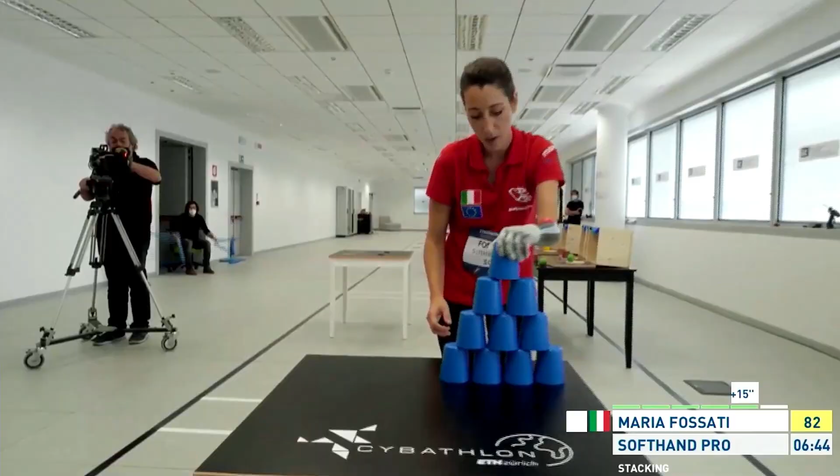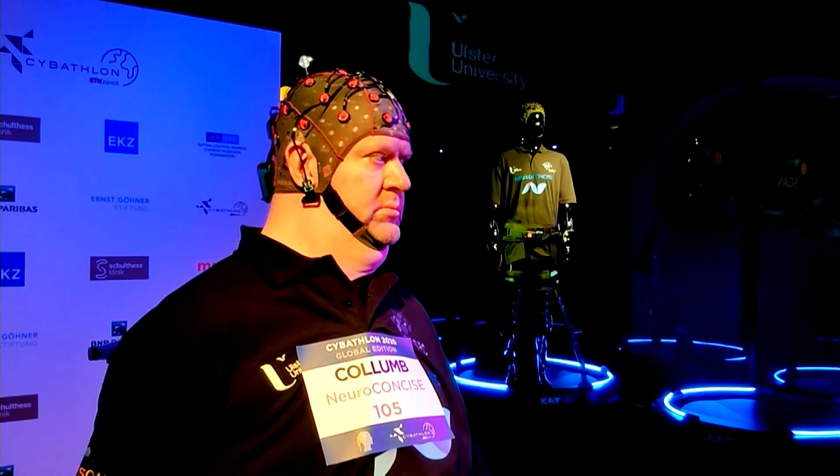What Cybathlon demonstrates is there are no boundaries. When you watch this event, you start to believe that is possible.

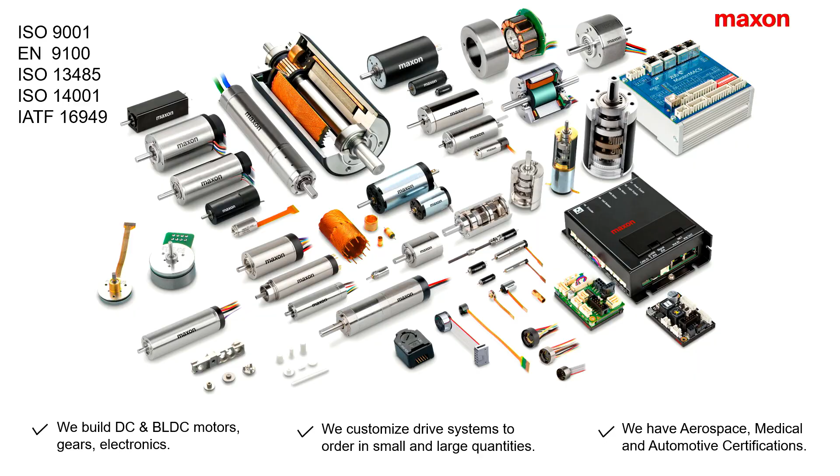We're already introduced. I just like to add, we're always very happy to discuss new, interesting, exciting technology opportunities.

One thing that is sometimes a bit overlooked: Max-Erik is not just a scientist and an engineer, but he can also support you in how you bring your idea to business success. So we also try to help you there.

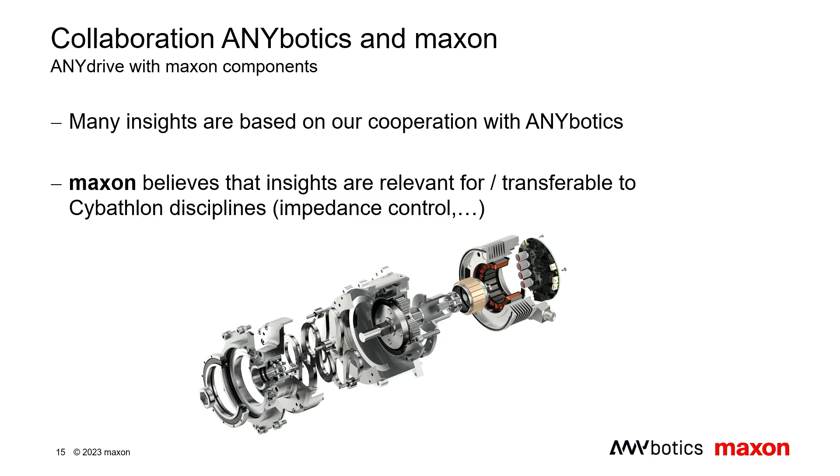Now, outside-in versus inside-out technology development. Before I go into the topic, a short disclaimer: a lot of the topics we discuss today, a lot of the lessons we learned in the past, originate from our collaboration with ANYbotics, so shout out to them. They're a fantastic company, we really enjoy working with them. We believe a lot of the lessons we learned are transferable to Cybathlon, that's why we're here today. But if you don't think so, in the Q&A please challenge our assumptions. If you don't know them, check them out, they have amazing videos and a very cool product.

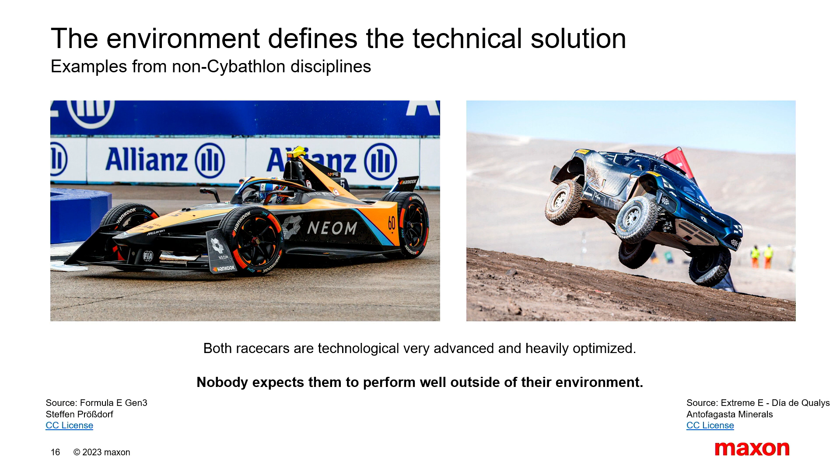Now, outside-in versus inside-out technology. It's all about the race, right? So this is maybe not the race you're in, but both of those systems are designed to finish a race as quickly as possible, to win, like Cybathlon. So the overall objective is the same, but they are very different. Why are they different? Because they operate in very different environments, right? And no one would come to the idea to take a Formula E car and apply it to a rallycross stage. It's not going to work, even though both are amazing technologies.

So why are we showing this? One, because I like cars, I spent some time in the automotive industry. Two, it's very clear no one would expect them to perform well in the other environment.

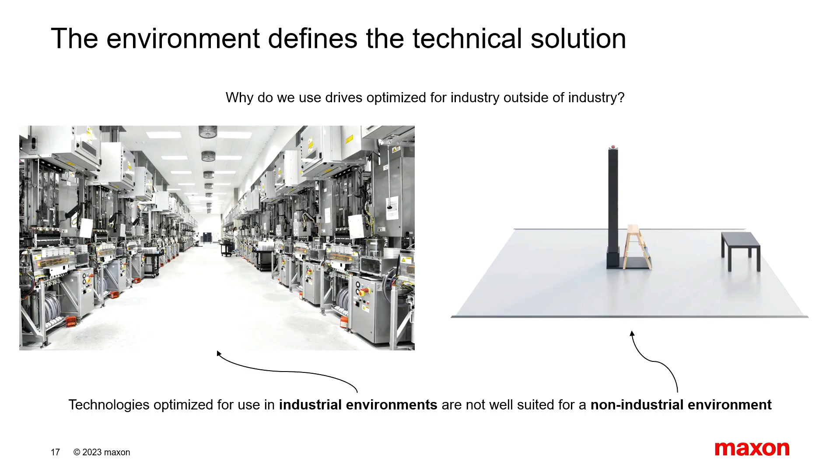So the question that we have is, why do we do this? Why do we use technologies that were developed in an industry environment and are optimized for an industry environment, and apply them to Cybathlon? Or if you think where your technologies will go in the future, outside, right? Your pilots at some point should leave the Cybathlon challenge. You would like to have people walk around here on stage or in the environment, a very unstructured environment. So we believe solutions that work well on the left are not necessarily working well on the right. And this is what we mean when we say the environment defines the technology.

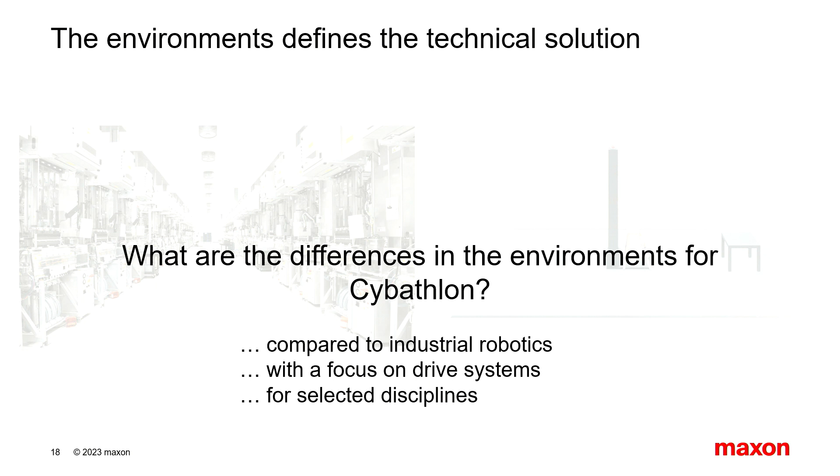So if you start to think about the solutions that work for Cybathlon, you should look at the environment you're operating in the long term. And you should compare it to the status quo, because a lot of people, when they talk about robotics, think about industry robotics, maybe even without knowing them. They're biased to that, to what they know. Now, we're not saying that robots in an industrial environment are boring or not challenging. There are some amazing technological challenges, and Maxon is also active there. We're just saying they're very different to what you need.

So robots in industrial settings work in a safe environment. What we mean by that is you cannot just walk into an automotive production facility where half-built cars are moved around by big heavy robots. It's protected, there are emergency shutoffs, the system will shut off if a human enters. This is different to Cybathlon or to any robot going outside of the protected environment.

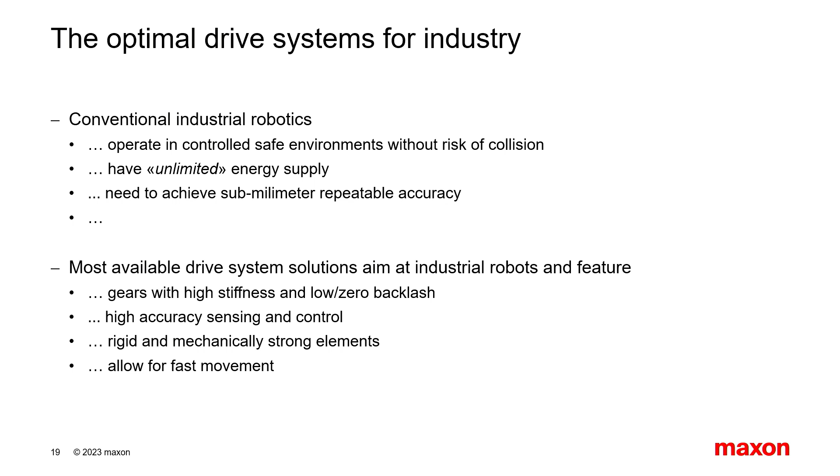They need to be super precise, right? If you have a robot that assembles a printed circuit board, you need sub-millimeter repeatable accuracy. If you walk with an exoskeleton outside, not necessarily. So the drive systems that were developed for these applications meet those challenges using specific technologies, and those are not necessarily the technologies that you need.

So, applying this to Cybathlon, starting with the Cybathlon disciplines, we looked at all 8 of them, and to be honest, there are 3 of them where we, as Maxon, cannot really help you. We still like to discuss brain-computer interfaces, no questions, but motors will not solve these challenges. The other 5, we might have something in our portfolio that can help.

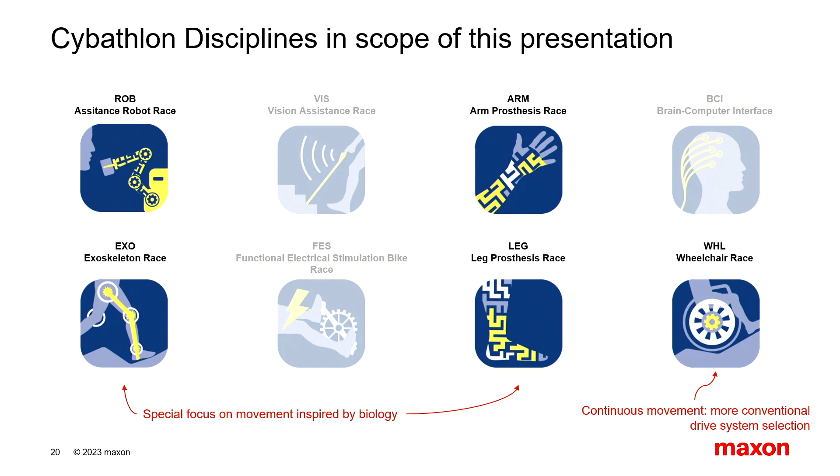And we would like to split those into 2 groups, right? There is continuous movement, driving around. That's a bit different to the other 4 disciplines, which are, I would call them, movements inspired by biology. So we will focus on the 4 on the left, and then I have a slide giving a bit of a line on how you can apply this also to the wheelchair race. Now, to make things a little easier, we just focus on the exoskeleton in the first step. So what's special about an exoskeleton and about the environment an exoskeleton operates in, right?

In the end, what we want to do, maybe not next year in Cybathlon but in the long run, is have someone with an exoskeleton be able to walk like a person without one, or maybe at some point do more. Why can't someone in an exoskeleton run faster than an athlete without one? What do we need to do to get to this point?

We believe to answer this, there are some characteristics to keep in mind. Exoskeletons are battery powered, they need to carry their own energy supply, unlike an industrial robot. Drives in an exoskeleton are part of the problem, but also part of the solution. You have to carry the weight of your own drives, so if you have light and efficient drives, your job gets easier.

A lot of movement is net-zero work. That is shared by some industrial robots too. I'll explain in a minute what we mean by this.

Collisions cannot be avoided. Every one of us who has the fortune of being able to walk without assistive technologies, without an exoskeleton, we stumble all the time. We run into furniture. Collisions happen. How do we build exoskeletons that can deal with that fact?

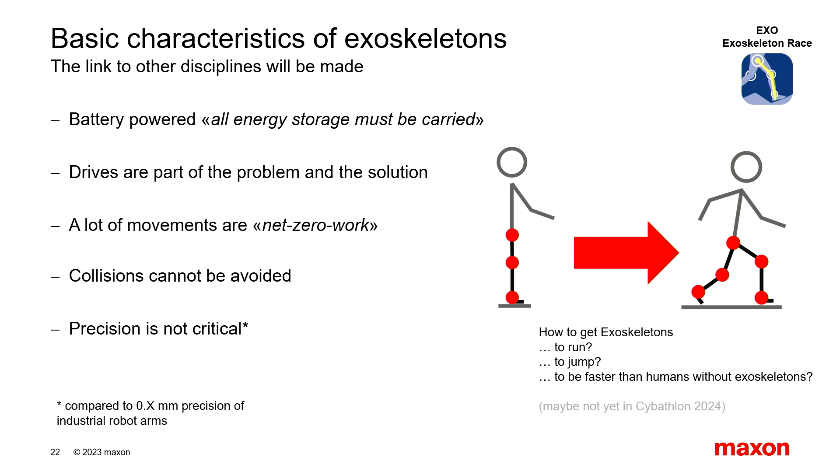And precision is not critical. It doesn't matter if I stand here or 0.1 millimeters to the right, you're not going to notice. So you don't need the same precision as in an industrial drive.

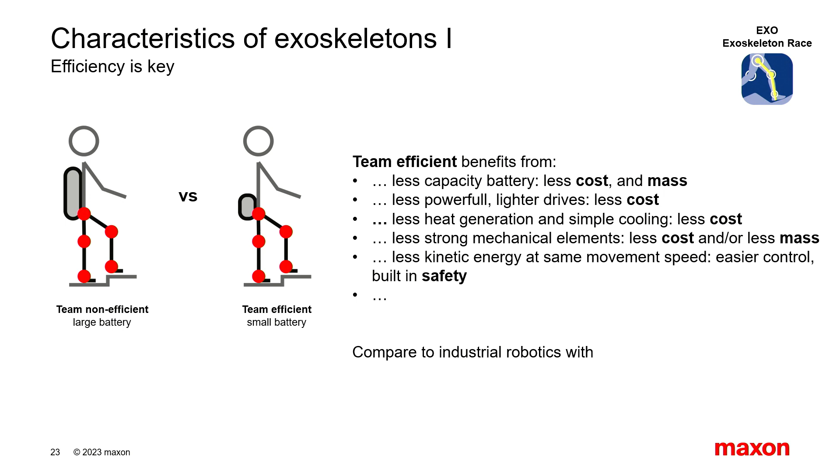The team on the right has somehow found solutions to be more efficient, so the job gets easier and easier. There are feedback loops that make it even easier: less cost, less mass, easier control, less impact energy, and so on. So try to be efficient. It's not as important when you're an industrial robot designer.

Second one, zero work. If you look at your Cybathlon disciplines, you start somewhere with speed zero, do some task, and end somewhere with speed zero. So the energy state at the beginning and at the end is the same. Everything you expend in work, you can get back. If you climb up a flight of stairs, you will also climb down.

So think about drive systems that are good at recuperating energy, because then you can make your battery even smaller. If you look at conventional data sheets, including ours, for motor drive systems in robotics, you only get one quadrant, the motor quadrant. But you also care about generator operation. So challenge this assumption that you're only looking at one part of the problem.

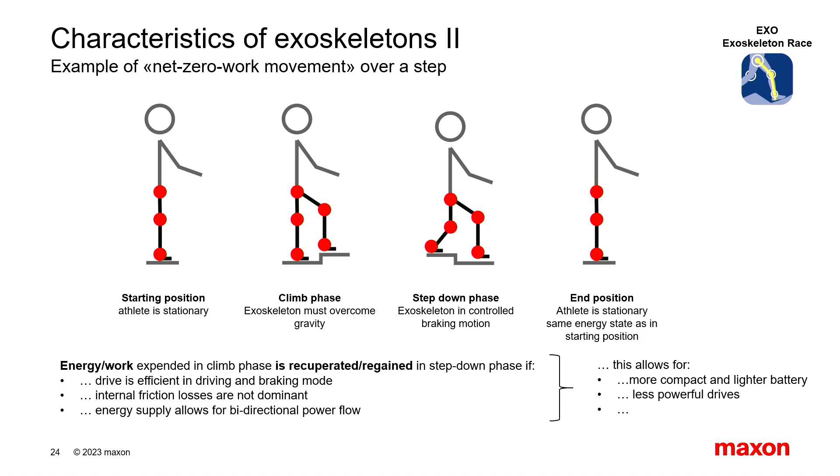And this is actually my favorite part, the collision part. As I mentioned, we run into stuff. In Cybathlon, you have a semi-controlled environment, you can design it so you don't hit obstacles. But if you think about where your technology will end up, hopefully in the future, the people that use it will have this problem. So what can you do?

So think about this, and think about whether those super precise and heavy industrial robot drive systems are really the light solution that you need.

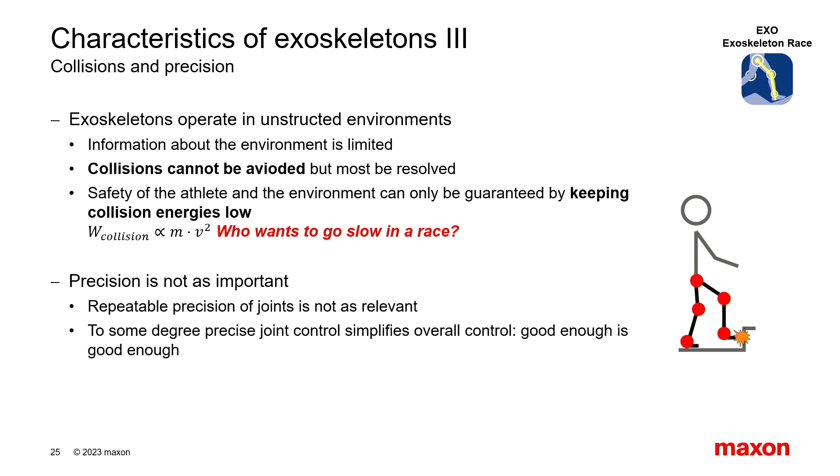Now the last point, precision is not important, I think I touched on this. Looking at the other applications, I'm not necessarily saying what we write here is completely correct. Depending on what you do in the assistive robot race, maybe you need a lot of precision, depending on your architecture and the solution you go for. But ask yourselves the question, and as a good starting point, focus on the difference to conventional robotics. Then think: which technologies can I change, which can I keep, how do I approach this?

The wheelchair race is a little bit different. You can still crash with a wheelchair, but usually the force and torque doesn't directly act on your driving system, so driving is a bit different from walking. But again, challenge all these assumptions.

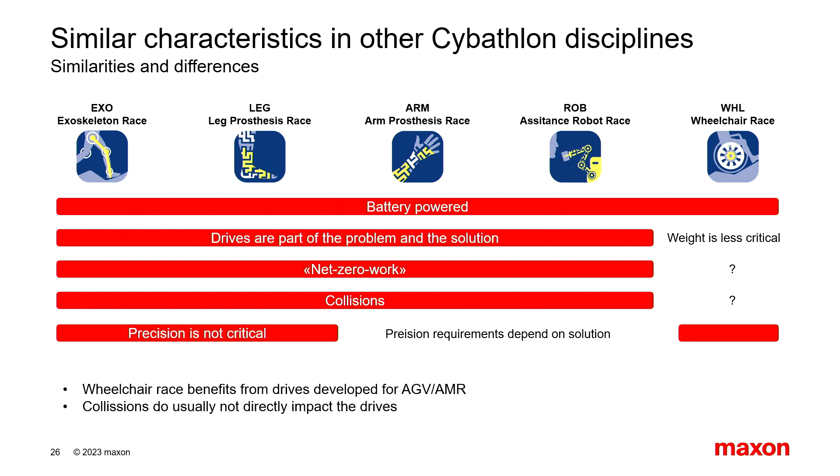Recapping this section: the environments are very different between conventional robotics and anything you use for Cybathlon. The question is, how do we select the right drive systems? And for that deep dive into uncontrolled environments, I hand over to Max-Erik.

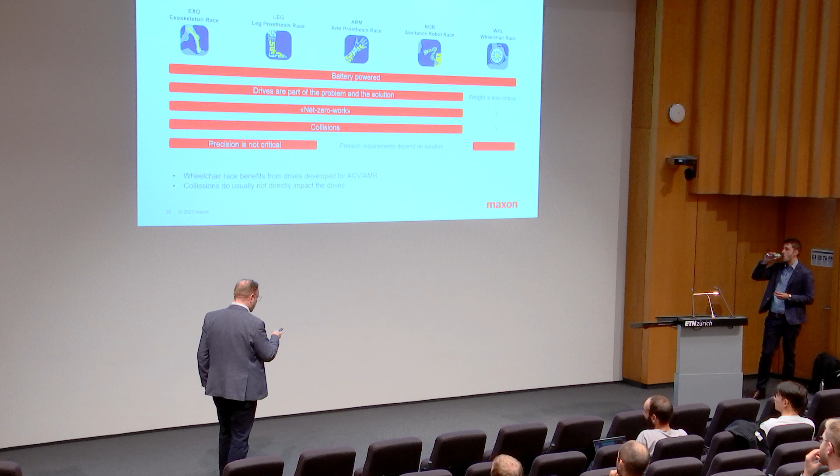And why can humans do that? First of all, we have our sensors on the outside, and we have the muscles on the inside, and there is a distance from the sensor to the bone. This distance is covered with an elastic element. So what happens is if our sensors are triggered, which is happening in this crash, then everything in the body will go down in energy, so it will do everything to get rid of the kinetic energy, if you want.

So in principle, you can say outdoor robotics is nothing else but management of collision energies. If you have a series elastic actuator of a robot with very high inertia, you will need a very thick spring. If a human being is very slow, he needs to have a very big body mass to actually absorb the collision energy.

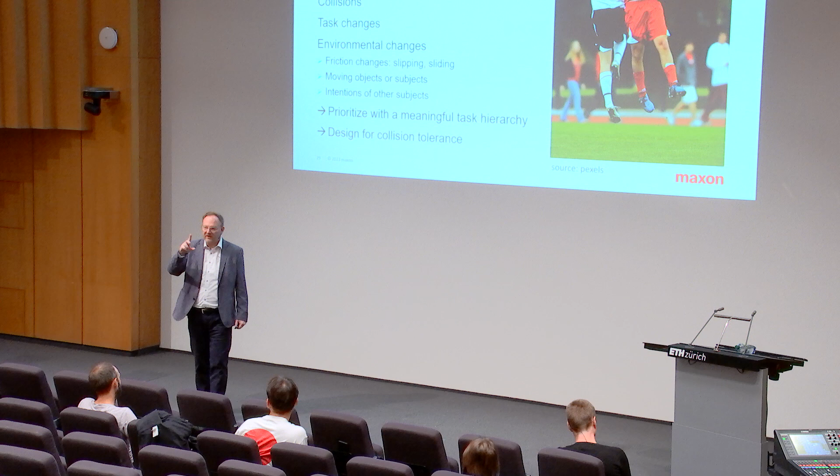Then the other thing in outdoor robotics is that motors are part of the problem and part of the solution, because the local derivative, the partial derivative, may be positive, but the total derivative may be negative. Adding torque to your system is not necessarily a good strategy. Let's put it like this: a cat can jump up trees, an elephant can't. They're both built with the same technology. So sometimes you may want to investigate if lowering the weight of an actuator actually helps.

And then the other thing to look at is, you don't have a measure of your environment. You're not in an industrial environment where you know everything, but you know nothing in principle. The only things you have are your eyes, your ground reaction force sensors at your feet, and the touch sensors at your skin. Everything has some kind of delay, and so you need very benevolent ballistic behavior if you want.

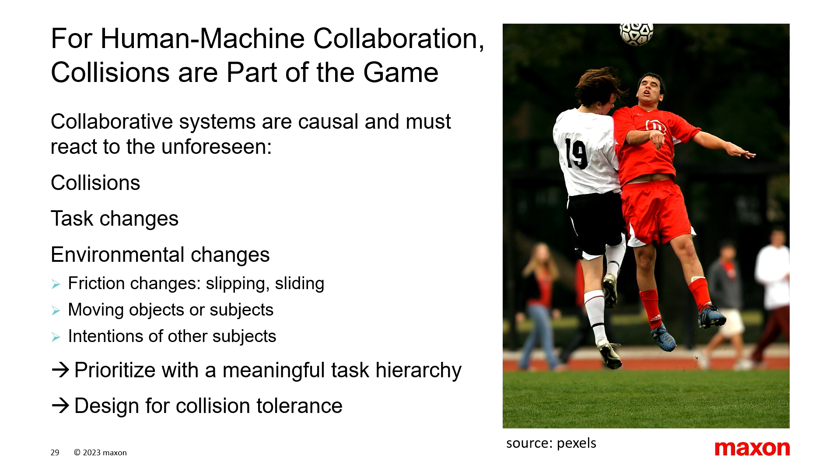It's clear, but that's your thing to solve, that you have to have a good task hierarchy and that you have to design for collision tolerance. So let's say we have two paradigms. One paradigm is the industrial robots, which are precise and where the motion pattern is in principle limited by technology, so you want to be as fast as possible.

In outdoor robots, actually, you don't know what's happening, and so you don't want to be as fast as possible. You don't just run around here in the ETH if there are other people, because you would crash into them. So the kinetic energy is not limited by technology, but it's limited by the collision scenario which would be probable. And the other thing is you don't need the precision.

For that reason, even if you want to be precise in a way, the question is, do you want total precision or do you just want local differentiability? Do you just want your Jacobian and your robot to exist? Oftentimes, if you have gravity assisting you, all gears, even if they have play, are in principle in a pre-constrained state, and so you have local differentiability without actually needing a very precise and very inefficient gear, which would probably be a strain wave gear, optimized exactly for the industrial environments which we don't want to talk about.

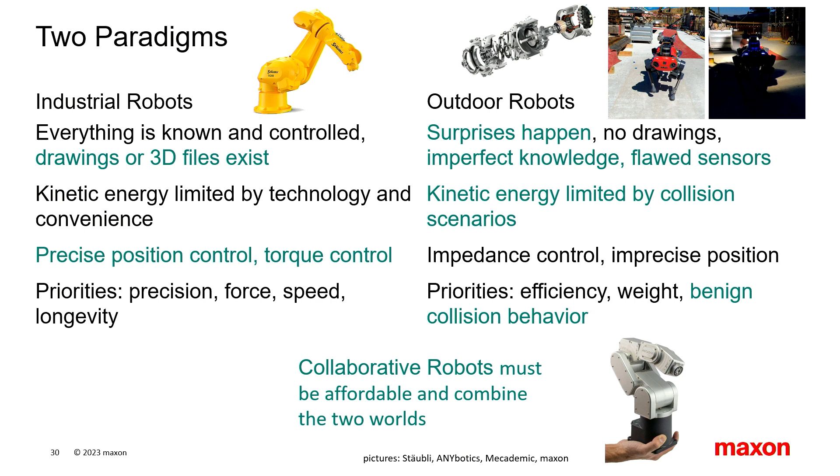So you see those two paradigms, and that means that you want to have impedance control, not necessarily position control, and you want to have some elastic elements, not necessarily something which is super stiff and super precise.

Now, the question is, if we say we have to limit impact energy, how do we want to do that? First thing is get slower. We have said already that is not really the strategy that you want to follow.

The other thing is you want to look for motors with a low mechanical time constant. What the heck is this? The easiest way to explain a mechanical time constant is that it links the motor constant, which relates the force of the motor to its inertia. If you have a certain relationship between torque and inertia, normally inertia is proportional to the square of the torque, and that's more or less a technology parameter.

So if you want to go down with this, you go for motors with a low mechanical time constant, not for motors with the highest torque density, for example, which is often a design error committed for outdoor robotics and which leads to very bad results.

Then the rest, I think you know: friction clutches are always good, or something which self-destroys at a given point and where you can reassemble, so magnetic couplings or whatever you want to have there. Lightweight design is a no-brainer. Use of tendons is something which humans have at perfection, and we'll go to that later. Putting the inertia where it doesn't hurt is a very good strategy for all kinds of robots. And then SEAs, that's clear, a no-brainer for the audience, I think, and even elastic padding.

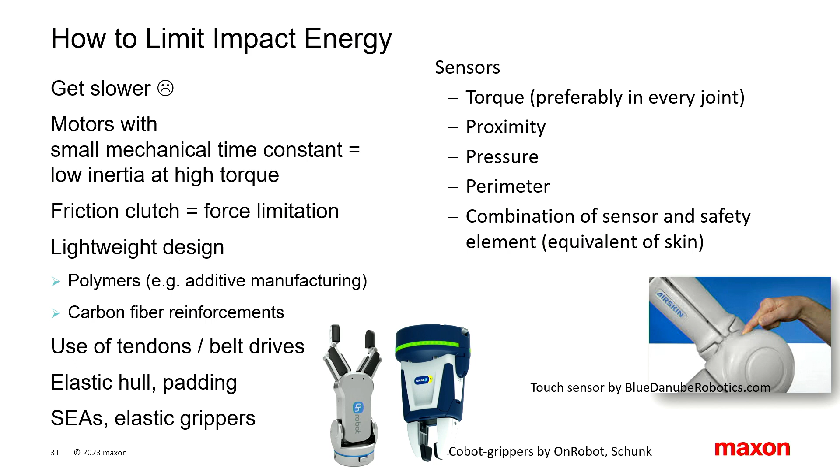One strategy which is often used, but not so much seen in Cybathlon I think, is that you say my elastic hull is also a sensor. So if you have an elastic hull with a pressure sensor or a microphone, it can function like a piece of skin where you really can make collision damage mitigation in time before something happens.

So what do contemporary robots require? There is always the engineer, the economist, and on the other hand the real requirements. Most of the time, I think people want to spend as little as possible on sensors, which I think also, if you look at what has happened in exoskeletons 10 to 20 years ago versus today, decent exoskeletons will use ground reaction force sensors because it's nearly impossible to derive your state without a GRF, for example.

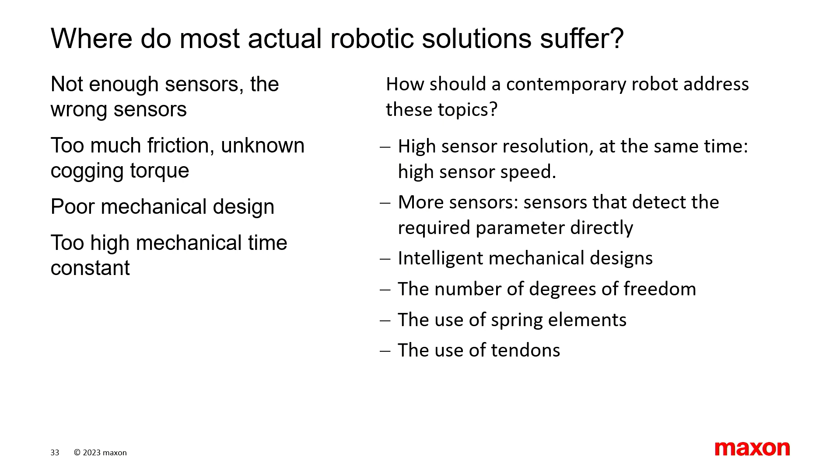So get more sensors, get meaningful sensors, and please sense what you want to measure, and perhaps spend more on sensors - they are not so expensive today anymore. That means, for example, having an IMU is much better than watching the motor current, which I would say is a poor strategy. It's always helpful, but try to also measure accelerations if you're interested in accelerations, or if you want to measure the body state, have good encoders, decent encoders.

It's clear that for robots, drive selection is not completely trivial. That's the reason why we have more than one motor. If there was the best motor, we would have a catalog with one motor. Life would be easy and really terrific for us, but alas, it's a little bit more.

So you see the selection criteria. I don't need to read them aloud to you, but it would be something where you really want to balance out all the things. Normally, for a Cybathlon environment, you would like to go for motors with low mechanical time constant. The other thing you want to look at is the losses at higher speeds. The third thing you want to look at is gears with very high efficiency, and I will come to that later.

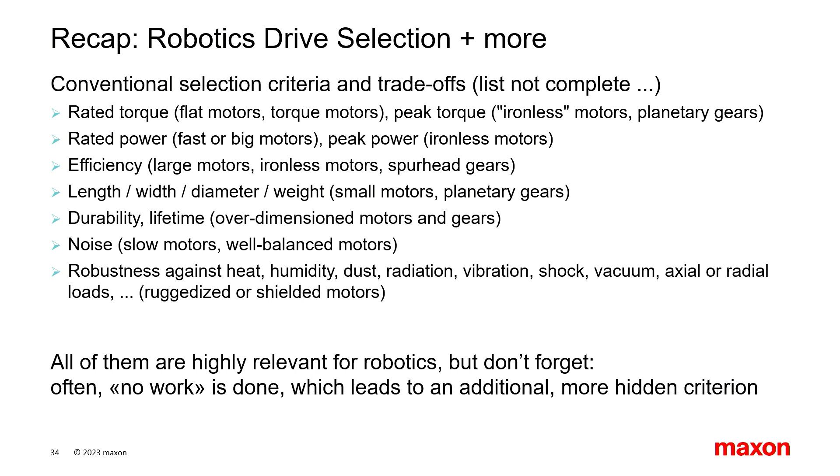Now we can make a deep dive and say, okay, what's happening if we want to go for movements with zero work? With movements with zero work, as mentioned before, efficiency is not exactly the criterion you want to look at, because efficiency is by definition zero. You have done something, you have done nothing, but you have spent something on it. So you go to an Olympic discipline, the 100-meter race, and the people are quite exhausted afterward, but you can tell them with a good conscience that they have committed zero work - so actually you've got a gold medal for doing nothing.

So, okay, what is here the figure of merit? The figure of merit must be something like the energy spent for a given task. And the given task could be something like moving a mass by a certain amount of meters in a certain time. So a mass, a distance, a time - or in rotatory coordinates, it would be something like moving an inertia, rotating an inertia by a certain angle in a certain time.

If you want to minimize your energy, you want to optimize your gear ratio. Everybody knows the formula: you adapt the gear ratio to the impedances, so you take the square root of both impedances, divide them, and that's the gear ratio.

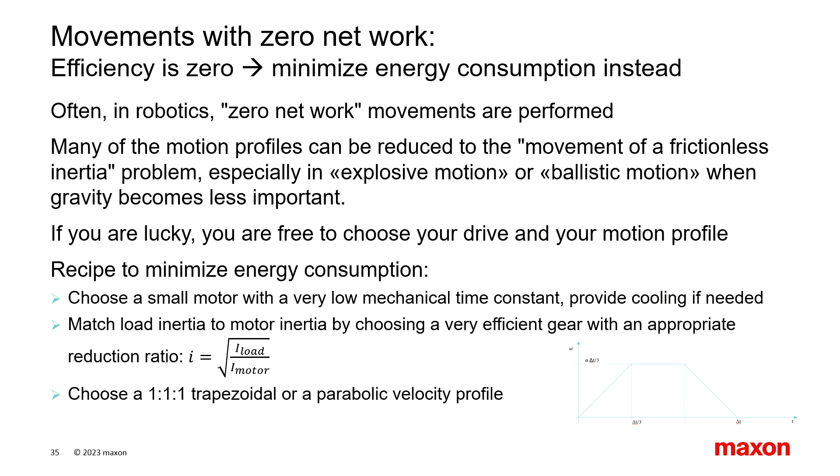The other thing is you want to use a 1-to-1-to-1 trapezoidal profile for this kind of motion, or ideally a parabolic profile, but that has some other drawbacks. So normally in industry you will go for 1-to-1-to-1 trapezoidal, but your mileage may vary.

If you have done that, you will find out that your movement is limited by this formula. This formula is not really published. I always say it's kind of too easy for a professor, because you cannot publish this—it takes about 20 minutes to derive on the back of an envelope. But it's also too complicated for most engineers because they don't have any idea about motors today. So I give it to you for free, this formula.

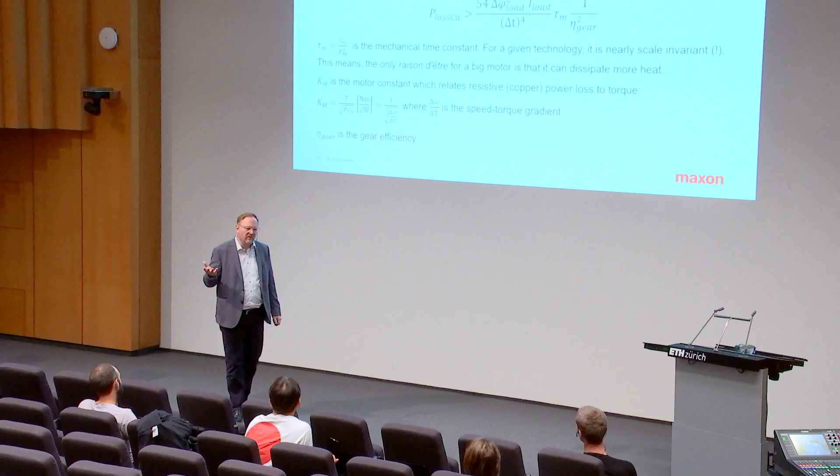In principle, the copper losses in the motor are in excess of 54—that's due to the trapezoidal profile. For a parabolic profile it would be 48, and that's the total minimum. You can do calculus of variations if you don't believe me. And then you have something where you have delta t to the 4th power.

It seems implausible, but let's put it like this: if some untrained person goes to lift weights, and you go to the Olympic Games and play the same thing with the same persons, you will see that persons of approximately the same weight are 4 times stronger if they're well trained.

And if you do running, what you will see is that an untrained person will run it at, let's say, 14 seconds, and a very well-trained person will do it at 10 seconds. So you have exactly the same 4th power. It's also there in biology.

You take the square root of 2, the square root of 4, and then again the square root—so the 4th root of 4 gives you the square root of 2. That's exactly the ratio of 14 seconds to 10 seconds.

So there's a speed limit here, and doing things faster in robotics will be highly penalizing. The other thing you will see is the famous time constant again here, and also the gear efficiency. We will dive into that later.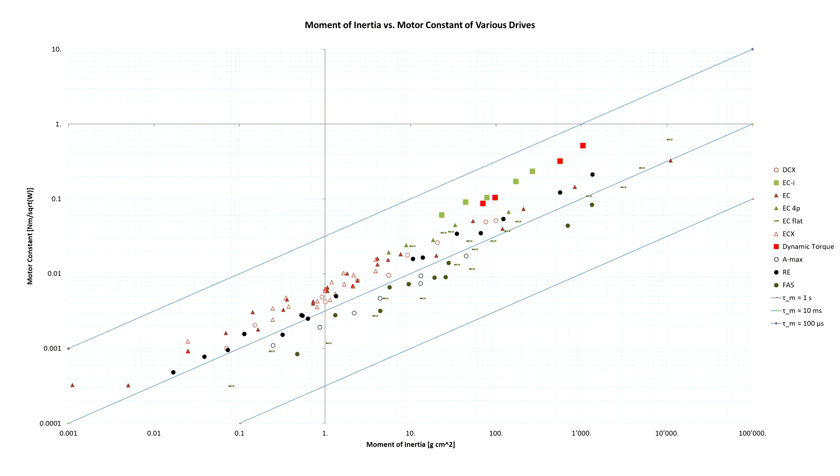It's a miracle, I don't know exactly why, because all the partial derivatives seem to point up or down, but the total derivative seems to be zero.

Now, since we cannot change too much about our reality, what can we do here? First, you can say: I want to minimize energy, so I work on the problem—because that's the most obvious thing to do. So how can you work on the problem? Minimize inertia. How do I minimize inertia?

We've said use tendons or use lightweight design. The other thing you can do is use resonators.

For example, insects—their wings are resonators. This is much better, because if you had to flap every time, that would be quite expensive in terms of motion technology. And that's the reason, for example, you have wheelchairs.

A wheel is nothing else than a resonator. So instead of accelerating and decelerating all the time like walking, with a wheelchair it is not accelerating and decelerating all the time—it's the same strategy. It's just not so good for unstructured environments.

Then we can work on the motor. And the motor, it's very easy: use a low tau m. But with a certain caveat, if you only go for tau m, then the motors might be a little bit lossy. So you want to use a well-balanced motor. For example, in our case, it would be what we call dynamic torque motors.

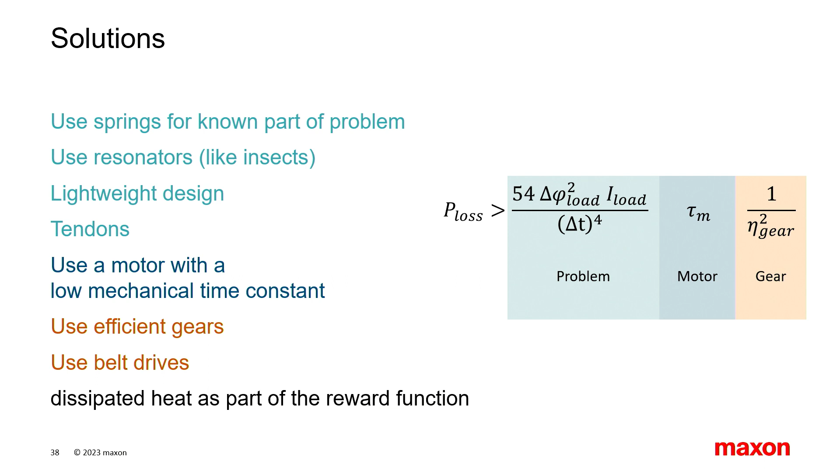Then the other thing is you can work on the gear, and the gear efficiency is super important. We will go back to that later because it's even more dramatic, related to copper losses, but there are other losses too, for example in the gears. You can also use belt drives, which are normally very efficient, so that's something I would encourage. Use sinews, use belt drives, or whatever you have, timing belts.

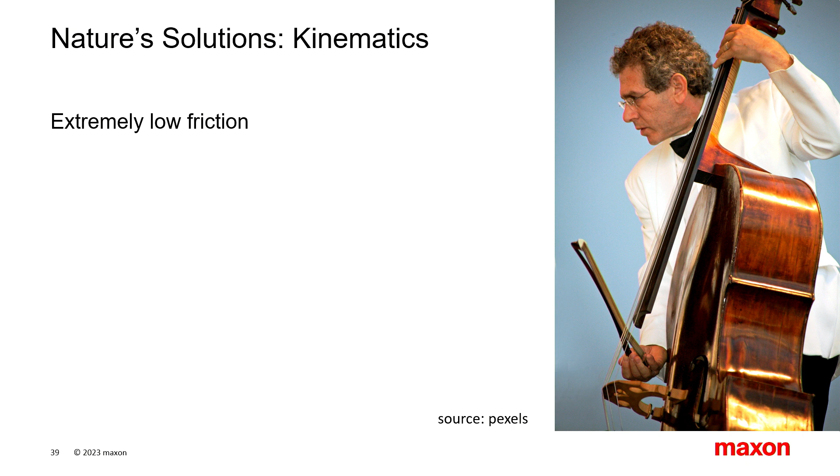In nature you see a little bit of exactly what we talked about. We have very low friction, and extremely good and optimized dynamic range. Because of the low friction, we can lift up a feather without destroying it, a bird's feather, but we can also chop wood with the same hands. That's something directly related to friction. So low friction gives you, in principle, robots that are good to interact with the environment.

And then the other thing you are looking at is very low inertia. As we said, we have muscles with a very low mechanical time constant. And the muscles are always located away from the actuator. So we have the muscles that actuate the hands located here, not at the hand itself. Otherwise the hand would be inoperable.

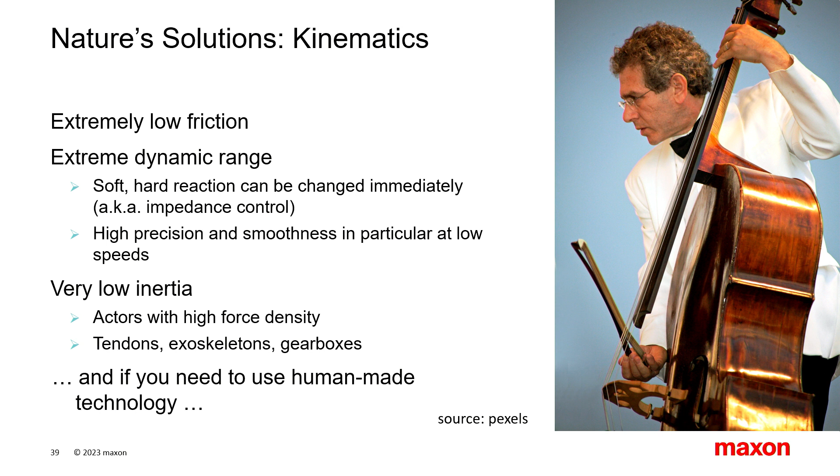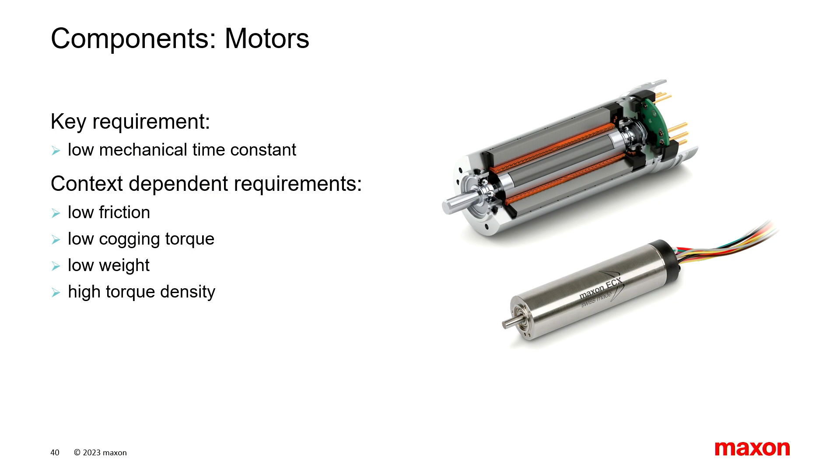If you have to use human-made technology, what are you doing then? Choose motors with low friction and low mechanical time constant. And friction, I mean not only mechanical friction, but also magnetic friction. So look at the working points and how lossy they are. Look at gears with very low friction. Low friction sometimes contradicts other things—for example, you only get low friction with higher play, and for that reason there's a lot of gear innovation going on, because these conundrums are solved in different ways.

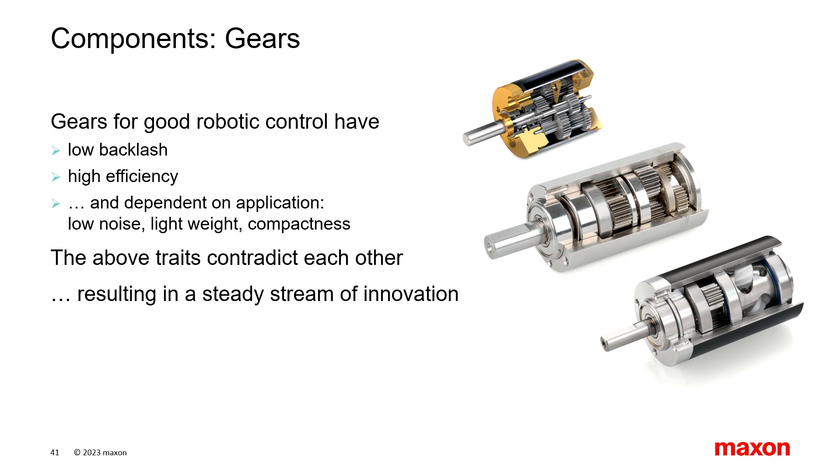Also, you pay a weight penalty if you want to be, for example, overly efficient or overly collision tolerant, and so oftentimes gear weight and the weight of your spring systems will factor into a total system simulation.

Okay, with the sensors, let's say you can use encoders, you can use force torque sensors, like for example the Bota Systems sensor—who are our friends here, full disclosure, but I don't have any shares. I think their idea is very nice, that they have a 6D sensor, because then you can do matrix gymnastics and project the force to whatever point you want in your robot, which makes absolute sense.

But you can do the other way around. You can use, like the Komuro lab has been doing already 15 years ago, just a sponge which is electrically conductive and which acts as a touch sensor—super low cost, super effective, and the sponge is at the same time also the elastic element of a series elastic actuator.

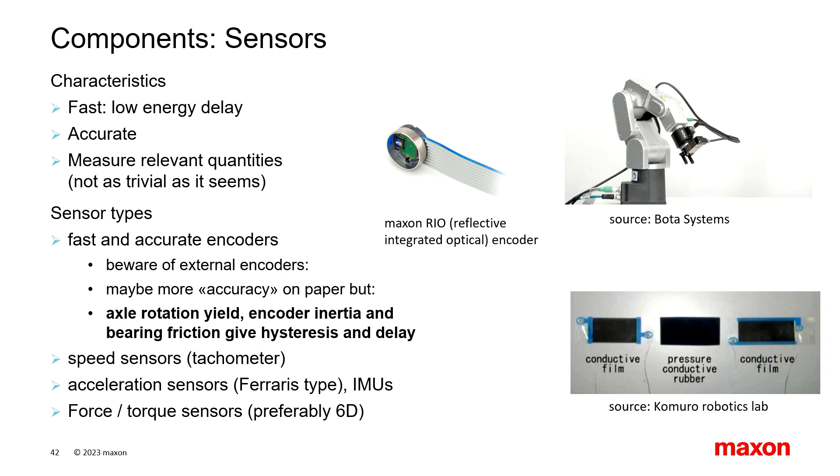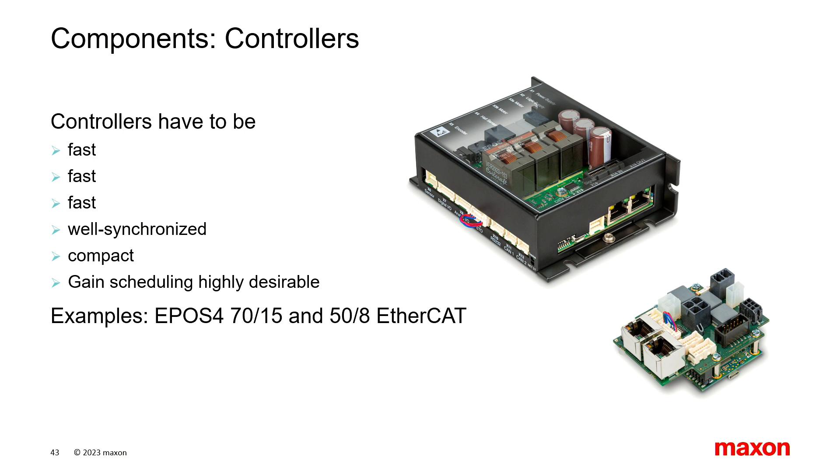And controllers need to be fast, fast, fast, even if you are doing slow movements, because you want to do impedance control, and the impedance range is directly proportional to the speed of the controller. So if you have a controller with a control speed of, for example, for position control, 2.5 kilohertz, then at 20 hertz, which interests you more, you will have a dynamic range of plus or minus a factor of 100.

Okay, now we want to adjust for reality, because oftentimes you cannot choose. Let's say, for example, you have a robot with serial kinematics, and you want a gripper which grips something for your wheelchair and does something—there are some Cybathlon challenges about that. If you have serial kinematics, what gear do you actually use? Because here I have a completely different inertia than at this working point, or at that working point. Same holds true for exoskeletons, so the inertias are very much state dependent. If I'm here with my leg or here, I have a completely different inertia.

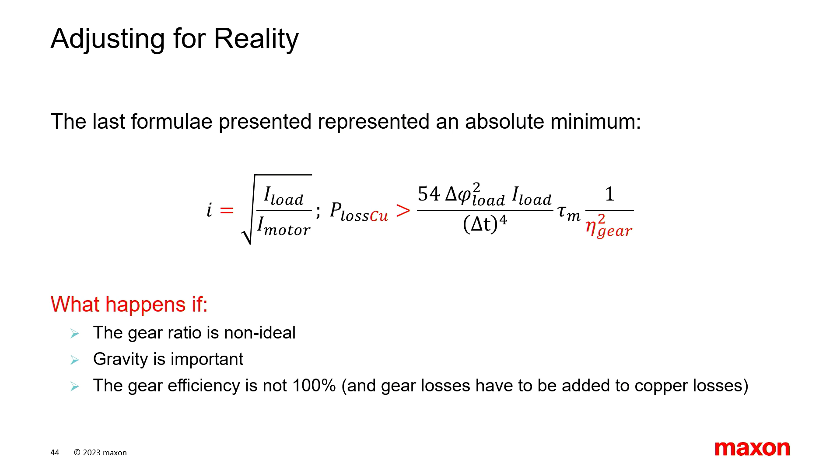What happens if I cannot do that? The other thing is, what happens if I have friction? And what happens if gravity is important? Because we said zero work, but if I have to stand here, I already have to support my weight.

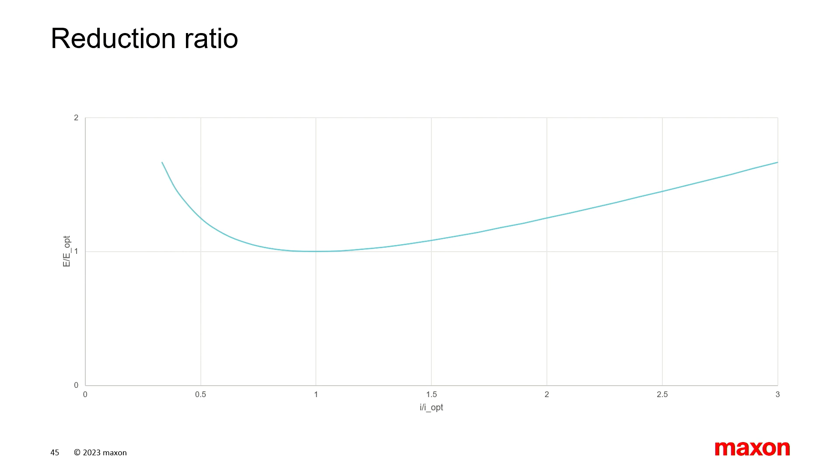So what can we do here? First of all, reduction ratio. I have good news here. If you miss the reduction ratio by a factor of 2, the penalty you pay for energy consumption is only 25%. Which means, in principle, you just take a medium, expected value of inertia, shoot for that, take your gear reduction ratio for that, and if your inertia is a little off, you essentially don't care.

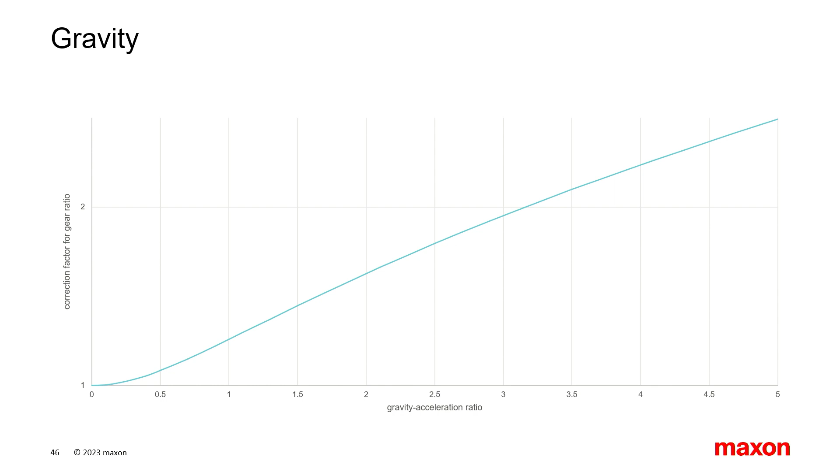Gear efficiency for zero net work is a completely different piece of cake. Because gear efficiency not only hampers your movement, but also hampers recovery. For that reason, gears get very hot and make very hot drives. Typically, what we use in industry would be strain wave gears, which have an efficiency of 60%, if you're lucky. Now, other planetary gears are highly efficient, with good roller bearings, which we've cranked out especially for the robotics industry, for auto robots. Then you go to something in the neighborhood of 90%.

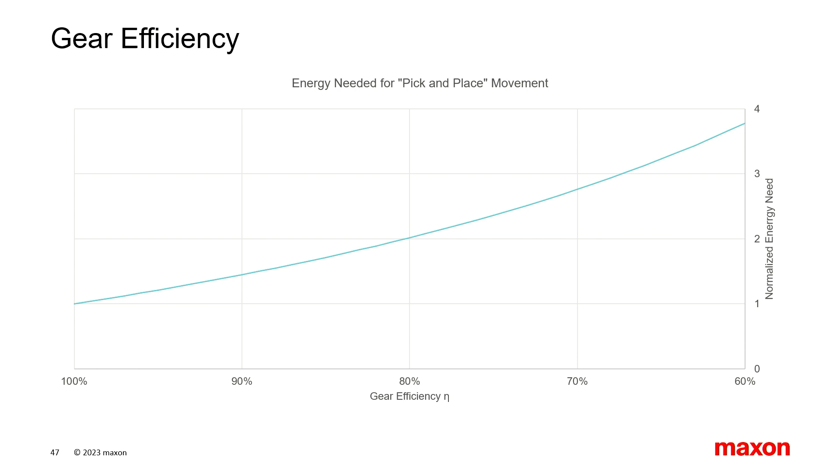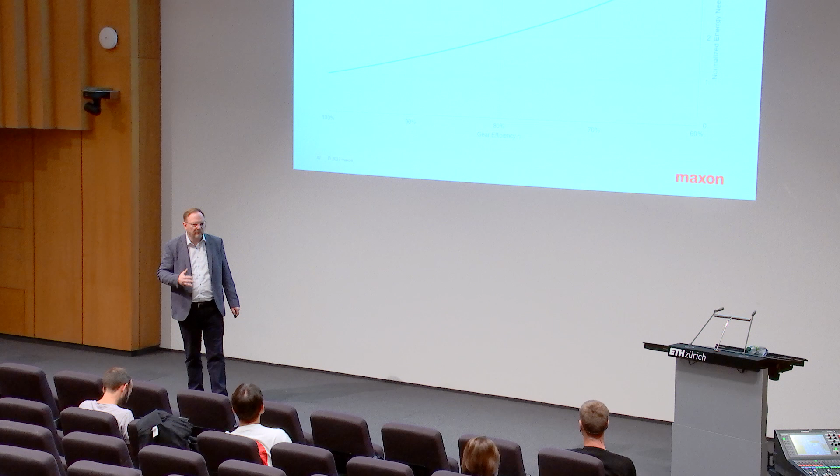So look at this: you're wasting something like 1.2 or 1.3 with respect to an ideal gear, and here you're at a factor of 4. If you divide those numbers, you're in the neighborhood of 3. So going from a strain wave gear to a highly optimized planetary gear will save you a factor of 3 in energy. That's not something we just claim—it's been proven in robots where strain wave gears were replaced with the other kind. That's a thing to look at if you're designing something.

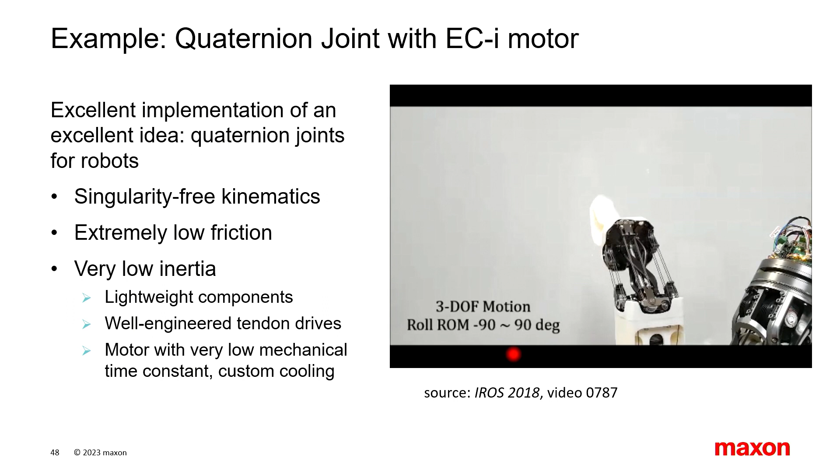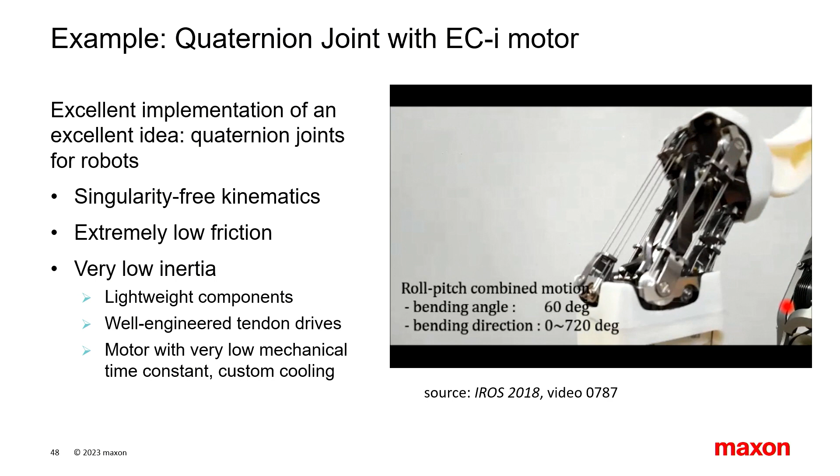Now let's look at an example of somebody who did really everything right. The first thing you're seeing here is that the motors are at the shoulder. The motors are actually very small—inner runners with a very low mechanical time constant, and also with cooling ribs added, because the cooling ribs don't add to the inertia of the robot, so you can dissipate even more heat.

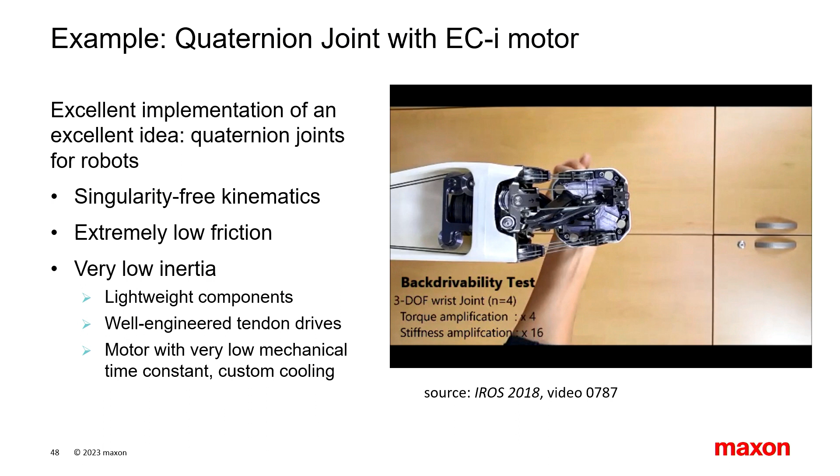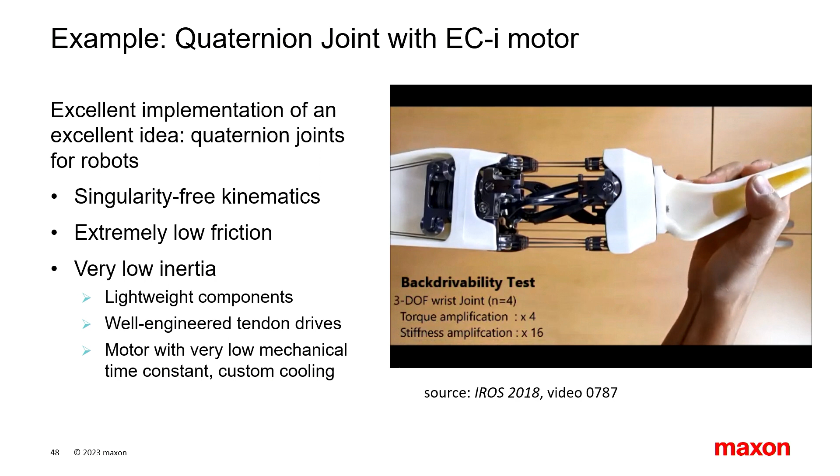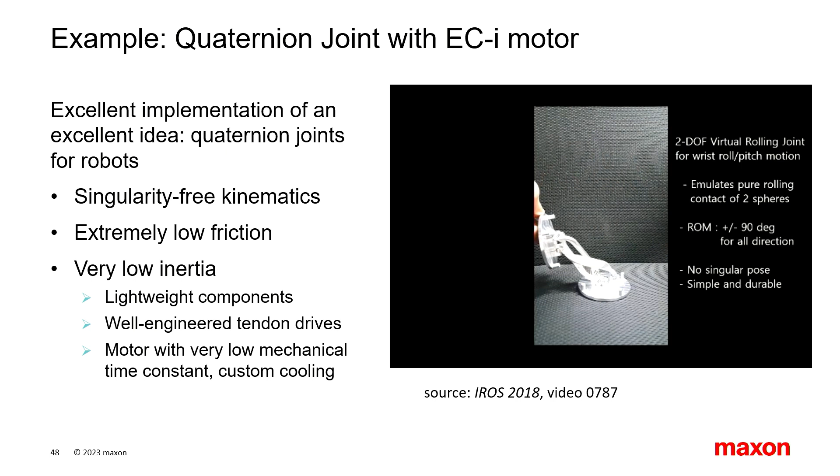The thing is extremely low friction. For that reason, it's completely backdrivable. You have steel tendons everywhere, which are super efficient, and the steel tendons serve at the same time as force transmission and force reduction, with different rolls with different reduction ratios doing that. What you also see here is the kinematics themselves are quaternion kinematics, which are easy to calculate and super low friction. So at the end of the day, the result is the robot has very low inertia and for that reason is very collision tolerant.

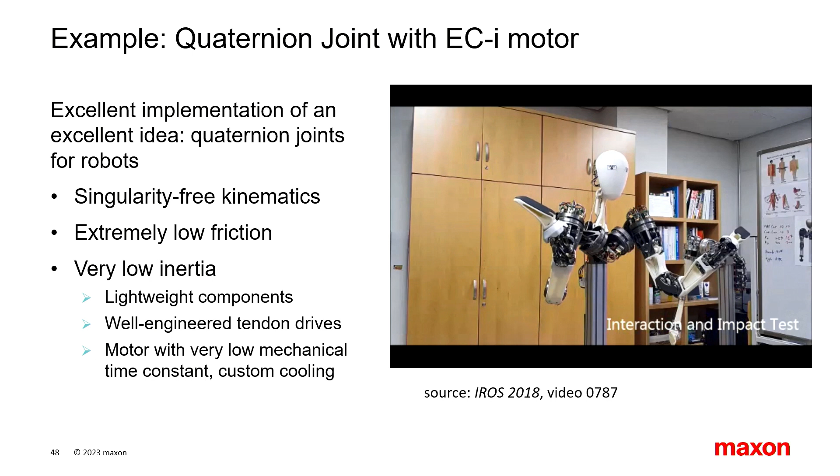That would be the end of a classical robot—hitting the arm with that frequency with a classical industrial robot would normally invoke the call of a service technician, or would trip the robot. And with that, I think I'm done.

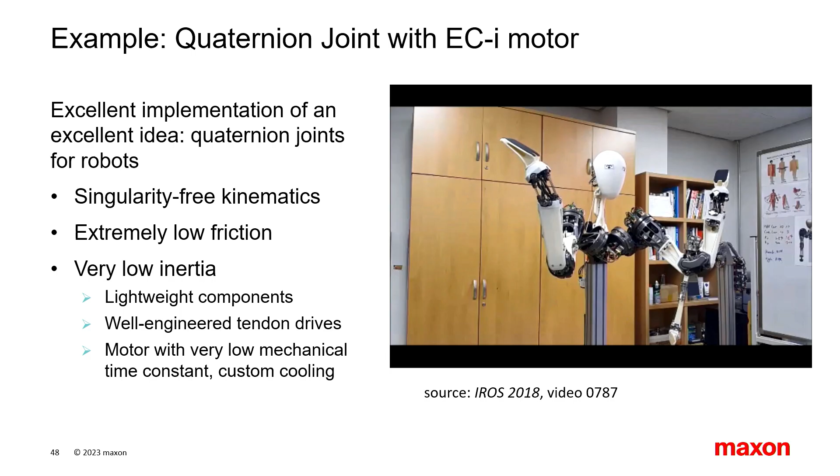So now you have an idea of the technology. But in the end, 2024, 2025, 2026, Cybathlon goes on. You have to put something on stage. So how do you go forward? How do you get to the point where you can go to an online shop, call Max Erik, and say, I have a cool idea, please give me the drive for free?

He might do it. But you have to tell him a number, right? How do you do this?

So a different example here. This time we go for the Assistance Robot Race, and the team decides, for whatever reason, we're going to build our own robot arm. Cool idea. What do you do?

Step one, you go watch next Thursday's user-centered design lecture, right? So this is obviously your starting point.

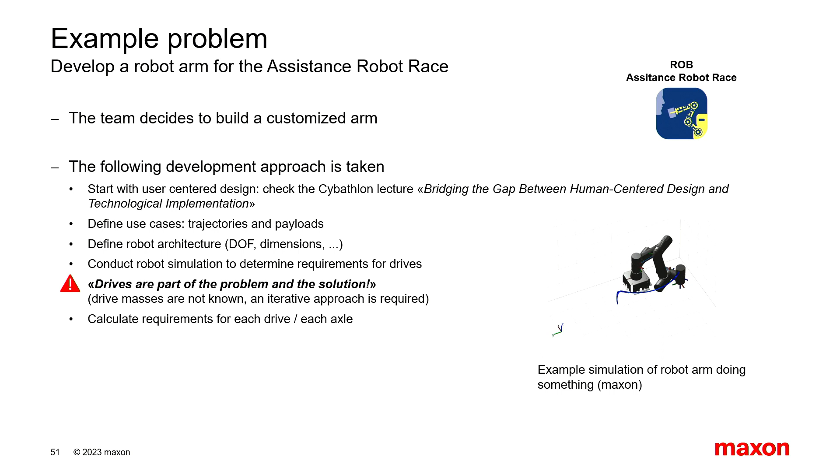Then you start to define use cases for your robot. You say, okay, this thing has to pick up an apple and move it. You have payloads whatsoever, you do your job, right? You define an idea for your robot, how big is it going to be, and so on. You do a first calculation about the torque and the speed you need at each axle of your robot.

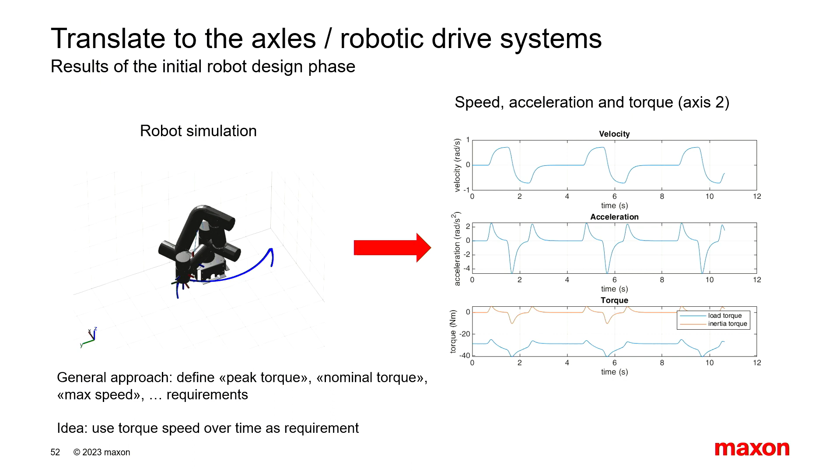Keep that in mind. You now have an idea about the torque and the speed. Maybe you have a mass idea from your team for your drive systems. What do you do? So, select the drive systems.

Easy, right? You go to our homepage, or a competitor's homepage -- hopefully not. You open it up and find hundreds of drives, electronics, and gears. What do you do? I mean, it's exhaustive. You need some electronics for your drive, you need a motor, maybe you need a gear.

Maybe you decided you don't want to go direct drive. We grade out the sensors, and you have the problem: I need to have an ordering number for my electronics and my motors. How do I do this?

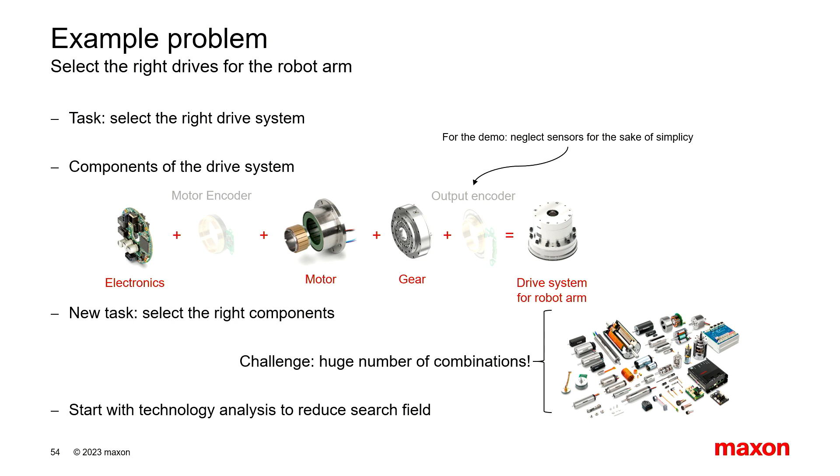The thing is, we have 8 of those, and we're one company. Obviously we believe we're the best, but other companies also have cool products, so you still have the problem: you have quite a large solution space. How do you solve this problem?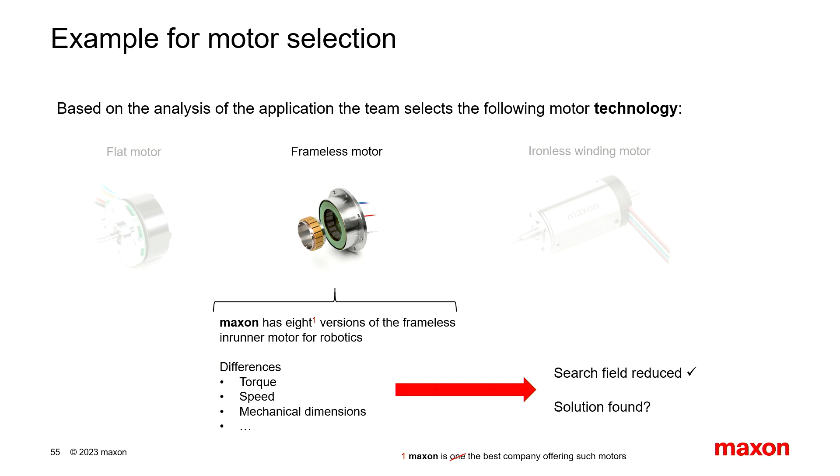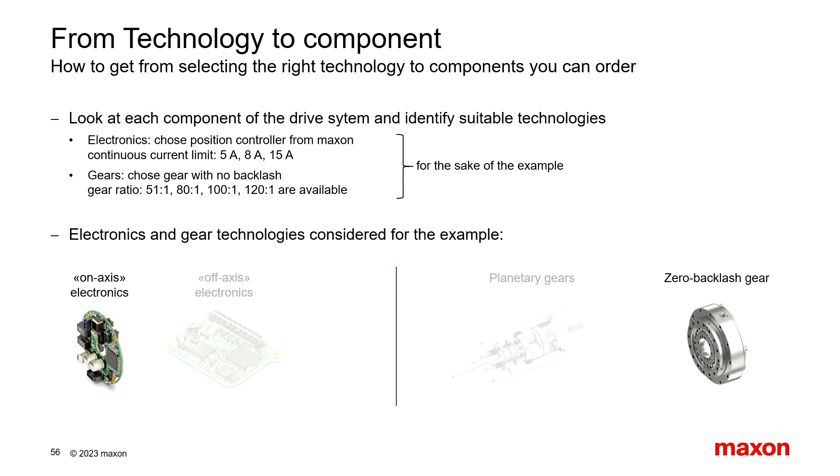I mean, you're going to do the same with the electronics, with the gears. Here, we use a strain wave gear -- maybe your application requires this precision. And we limit ourselves to only commercially off-the-shelf components. What you see is, for example, 8 motors.

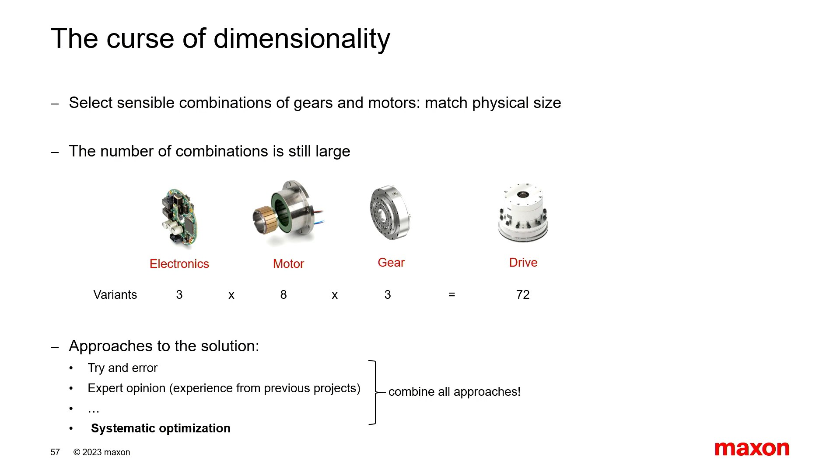We have about 3 electronics that fit to that, 3 gear options -- this would be another supplier. You already have 72 options. How do you get to the one optimal solution?

You can try and error -- good luck, it's going to be a lot of fun. You'll have a lot of drives lying around, but it's going to be costly. I don't know what the sponsoring is of your team. Ask experts, see what worked in the past. This is a good idea.

You can try some other stuff, but in the end, you need some sort of a systematic optimization to select the optimal drive for your application. And we do the same.

So we also do this for industrial customers -- we sell this service. What we do is take a model-assisted approach. We have models of our drive systems and of our competitors' drive systems. We simulate the performance of the drive system, select the best suited drive system, and at some point -- or for some of this it already works -- you have a closed-loop optimization.

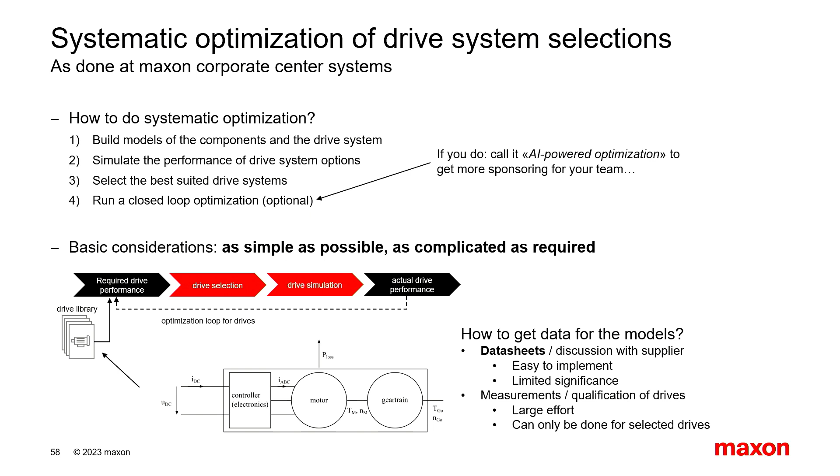If you do closed-loop optimization, call it AI, you get more sponsoring for your team. Now, how do you get this? You don't have a measurement lab at home, you can probably not characterize different drives. Well, use the data sheets. A lot of information is available. So how do you build your drive library? There are different ways of doing this.

What I would take here as a message: be simple. I know that myself, I also attended here. Engineers from ETH have this tendency - if you can model some physical effect, we're going to do it, because it's cool, it's interesting. But the thing is, it just takes a lot of time.

What we show here are 3 different options of how to model a motor. The one on the left is all values you find on our data sheet. You can do this in an afternoon, in a little Python script, or in Excel if you want. The one in the middle - don't go into the formulas - you can also do this with our data sheet, maybe 1 or 2 phone calls to your motor supplier.

Of course it's going to tell you more, but really ask yourself the question: what accuracy of model do I need to answer the current state? You can drive this to exhaustion, you can do a PhD on these kind of topics. So keep it simple - you can already do a lot with very simple models.

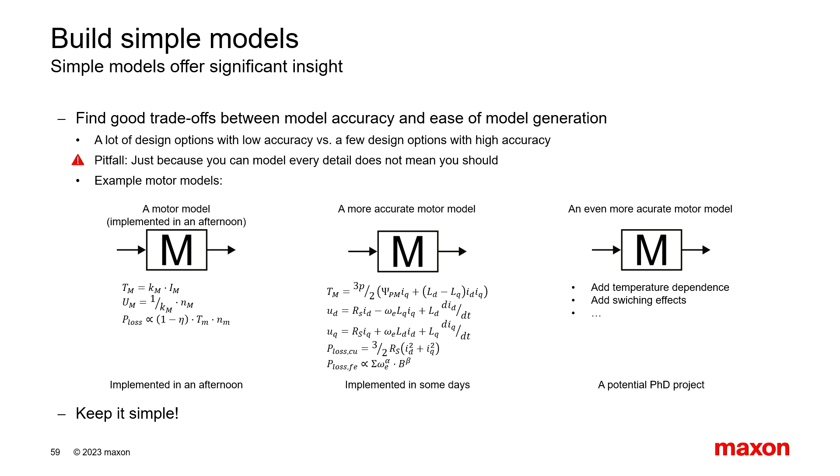I give you an example of what you can do. Now you can read this yourself. There are some things you need to be able to do - your model somewhat needs to transfer inputs, like current and voltage in this case, to torque and speed. And as maxon mentioned, there is nothing for free - you will have some losses, but that's about it. You don't need much more than that.

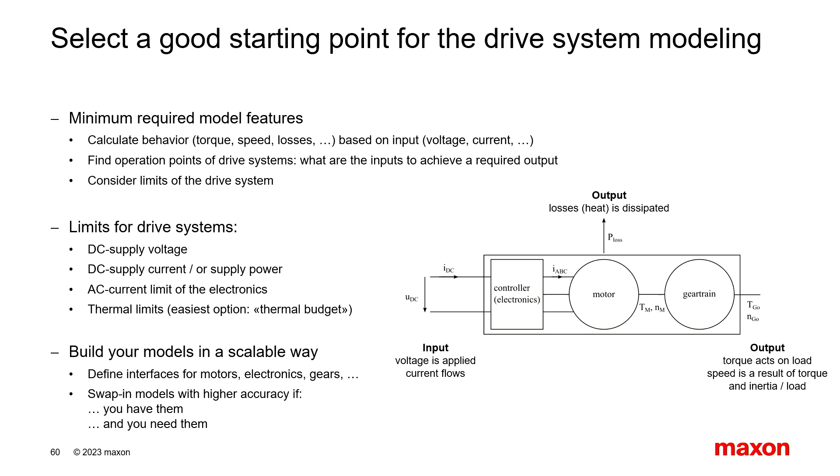Now giving you an example: we're building a robot, we decided we need around 150 Newton meters. We selected Maxon because we like the logo, we like the products, whatever. We selected 4 drives - actually we looked at more, but there are 4 candidates which are reasonably close - with a gear ratio of 1 to 100. So which one do you take? None of the motors really fits your torque speed requirement of 25 RPM, 150 Newton meters.

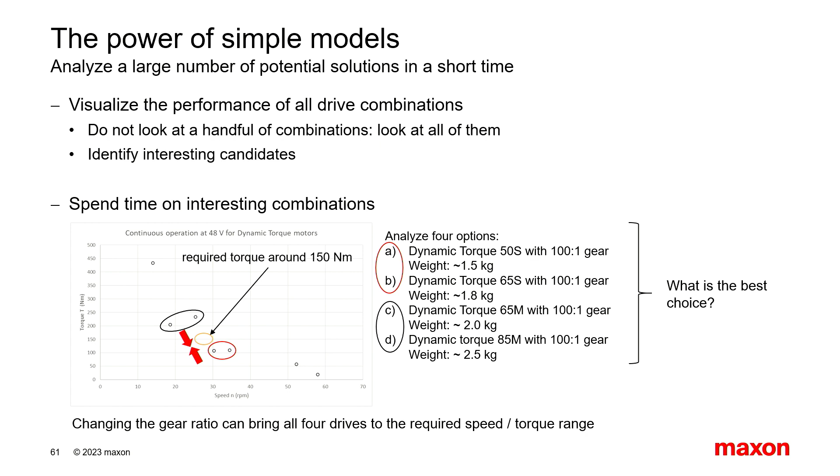You pay in mass. But what you can do here is with very, very simple behavioral black box models, you can identify trends, and then you can go to your team and say, can we afford a more expensive, better cooling system and overdrive our motors, get more torque out? Or do we say no, it's better to use a bit heavier drive? We pay the price in collision energy, but we have a simple cooling system. So very simple models allow you to identify trends which you don't see if you only look at the data sheet.

Another benefit, if you do this early in your project, it's de-risking. You know you looked at all the options. You know that not shortly before the competition, someone will come with a genius idea and you overlook the drive, because you looked at all of them.

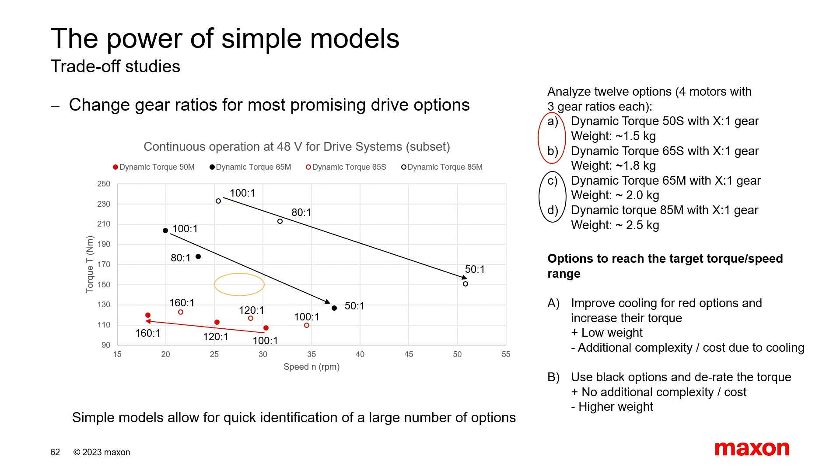Next thing, remember I told you to keep this in mind. What you can also do, if you have a model which can visualize the behavior of your drive, you can do something like this.

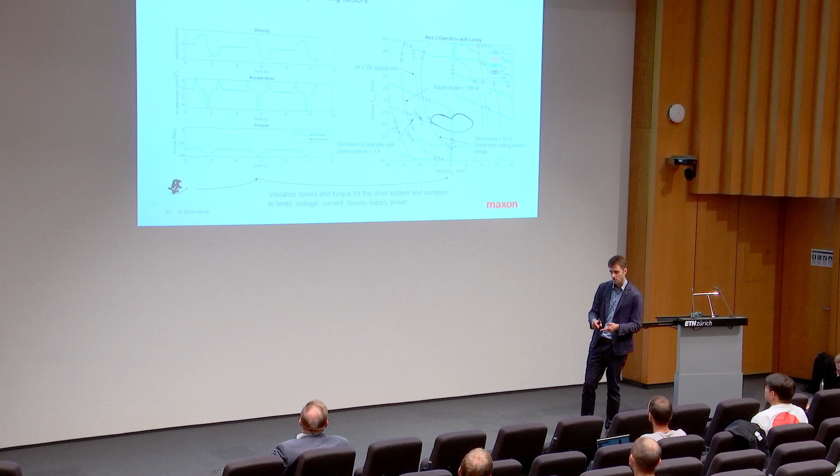We also look at losses. When this blue line is the cooling line, you can talk to your people like, do we need a fan or not? And the person will say, no, it's an aluminum design, 50 watts, no problem. So you can look at a lot of data, and go deep dive in one option and really look at what are the limiting factors to your drive.

Summarizing, keep it simple, but do it. Don't just go in data sheets or call us and say, we build a robot, we need a 40 Newton meter drive. Be free to share with us this data, we will also challenge it if you want. Simple models bring you a long way.

Don't go really crazy. Predict the performance early in the design. De-risk your designs. In the end, you have a hard date, when you have to be finished, like I'm with my presentation now, have to be finished, you have to go and put your exoskeleton on stage, right? So if you de-risk early, you have less sleepless nights shortly before Cybathlon.

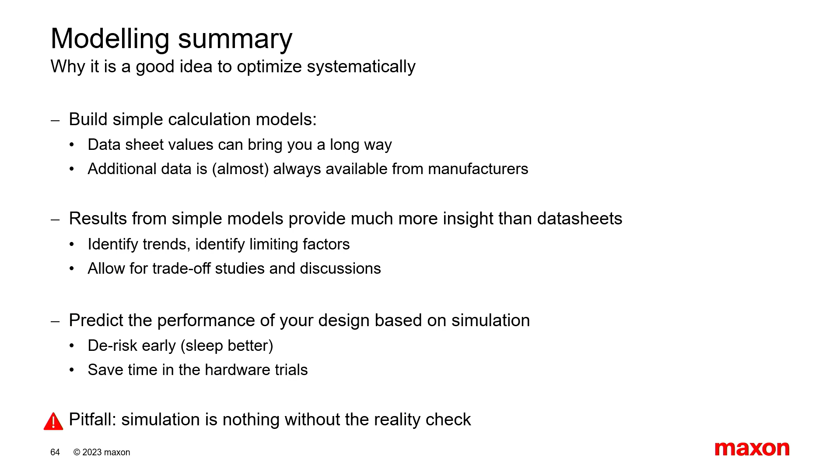And the last point is really, simulation and design is good, but it's nothing without reality. This is really where your previous projects come in handy. Recalculate your previous projects compared to measurement to calibrate your simulation tools, because only then do you really have meaningful results.

Last point, Young Engineers Program. I'll do this quick. This is aimed at people who think of entering Cybathlon. We like to help you there. We can only help you on drive system, but it's a very low entry barrier.

So you sign up, it's an online form, it's also in this presentation. From us you get drives at a reduced price, sometimes for free, and the important thing is you get access to technical support. We talk openly to you, we can also help you in other topics maybe, but it's really a cool way of talking to us, and we really like to support Cybathlon, not just the competition, but also the team. I just have 2 examples, one in Canada, one in Greece. This is a worldwide program for us. Probably at the end, you're still just going to talk to maxon, so it doesn't matter where you apply from.

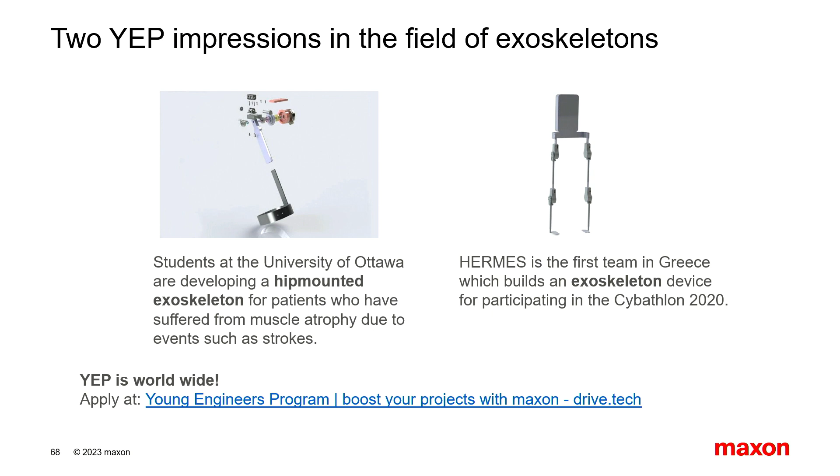All right, this concludes our talk. The take-home message is environments define technologies. Be careful about the biases you have in the back of your head, or your professors might have, because they spent 20 years doing industrial robots. For unstructured environment, think about the inertias, the elasticities, and the friction. Think about biology.

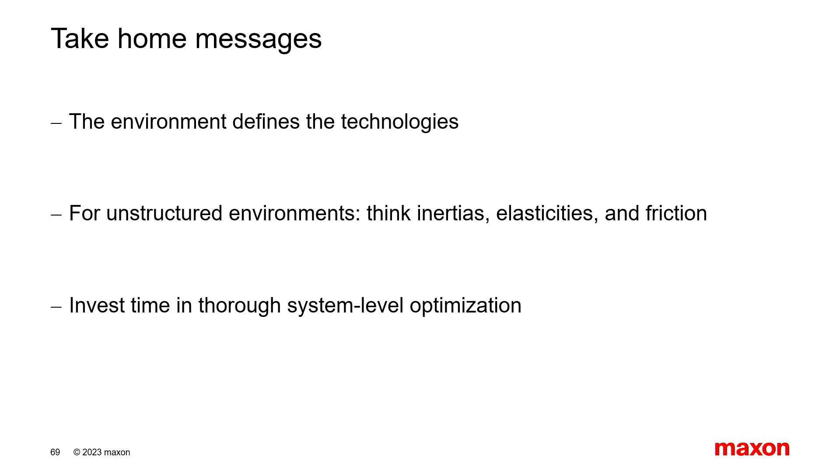And the last part, invest enough time early on in thorough system optimization. Don't just start because it's cool to have hardware on the table, make sure you get the right hardware. This has been our talk. I think now we are at Q&A, right?